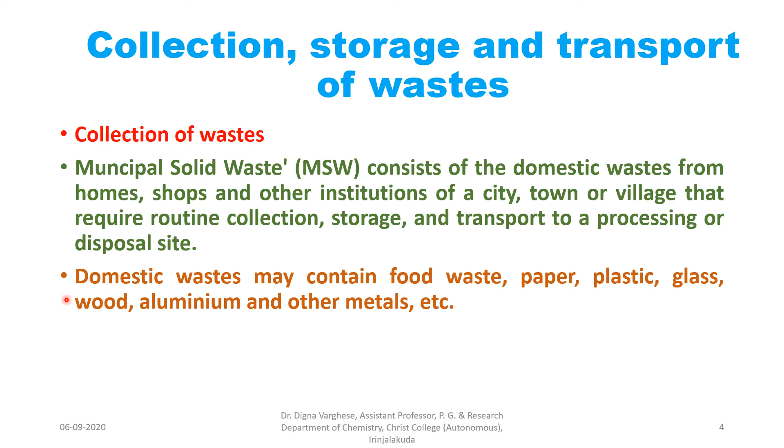Municipal solid waste, that is MSW, consists of the domestic waste from homes and also from shops and other institutions of a city, town or village that require routine collection, storage and transport to a processing or disposal site. Domestic waste may contain food waste, paper, plastic, glass, wood, aluminium and any other metals or

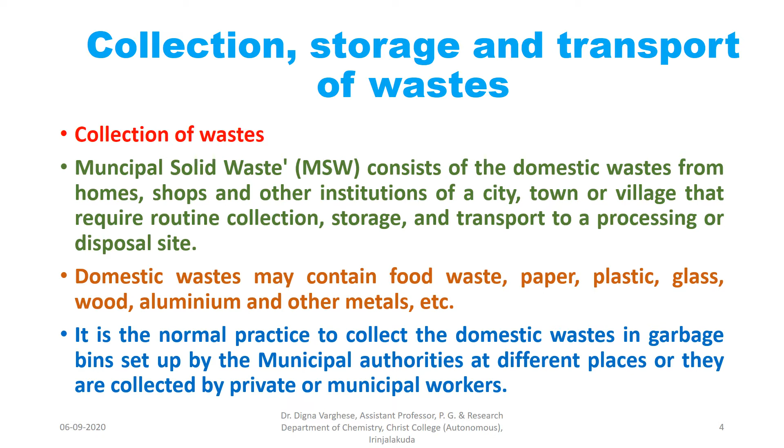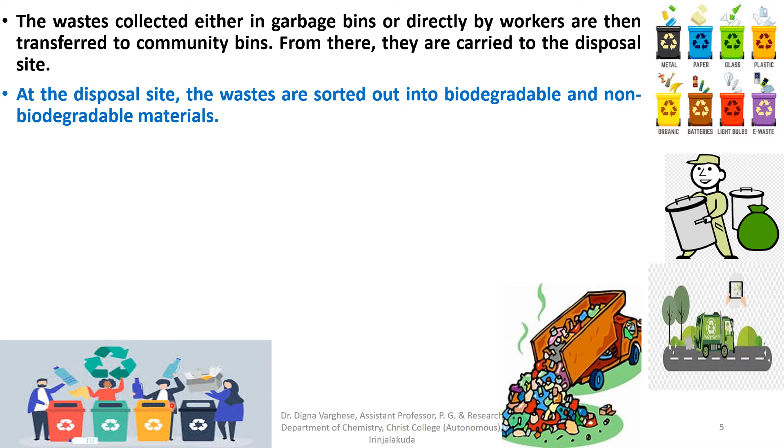unused substances, etc. It is the normal practice to collect the domestic waste in garbage bins set up by the municipal authorities at different places, or they are collected by private or municipal workers. The wastes collected either in garbage bins or directly by the workers are then transferred to community bins. From there they are carried to the disposal site. At the disposal site, the wastes are sorted into biodegradable and non-biodegradable materials.

Unlike the municipal solid waste categories, there is considerable diversity in the characteristics and composition of industrial solid waste because they are generated from many different types of industries. The waste categories are dependent on the nature of the products produced. Each industrial unit makes arrangements for the waste collection, storage, and transportation in consultation with the municipal authorities.

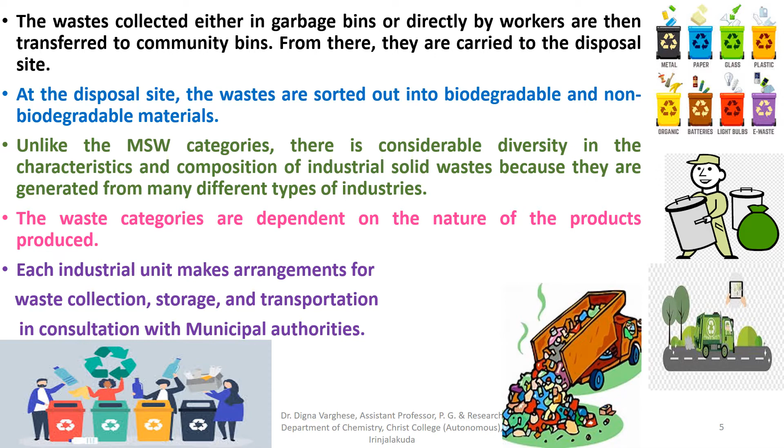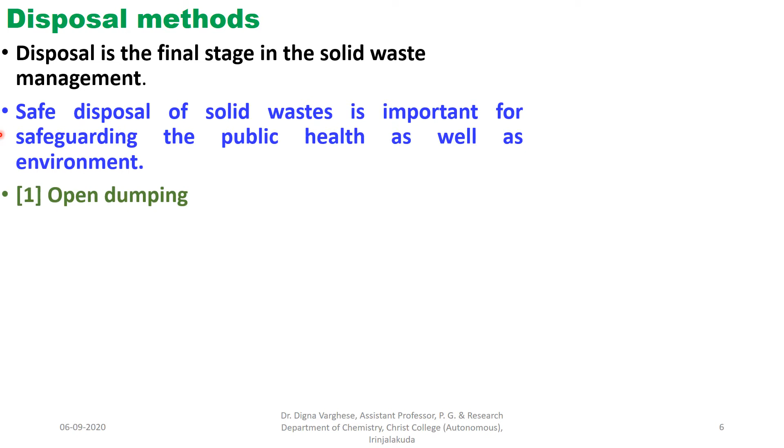Disposal methods. Disposal is the final stage in solid waste management. Safe disposal of solid waste is important for safeguarding the public health as well as the environment. How can we dispose of the waste in a proper way? There are several methods. First one is open dumping. Waste can be dumped in an open place.

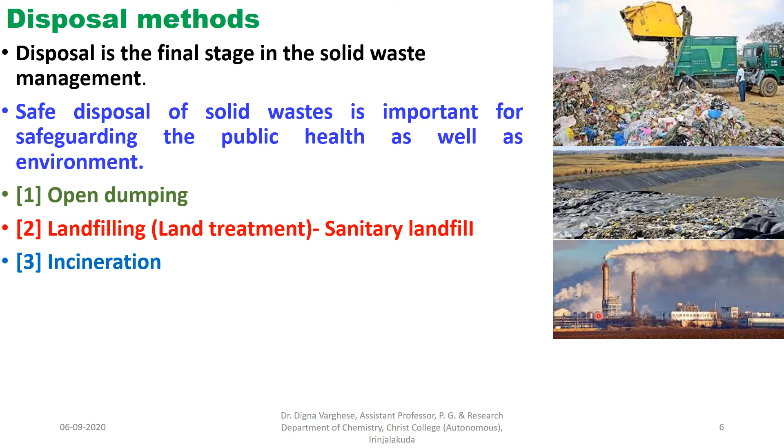Landfilling or land treatment, also known as sanitary landfill, that is, the waste can be filled in a proper land. Incineration, the waste is incinerated into ashes and some gaseous products. Another disposal method is composting, and anaerobic digestion, also known as biogasification. By this, biogas is produced. And the last one is recycling the waste materials.

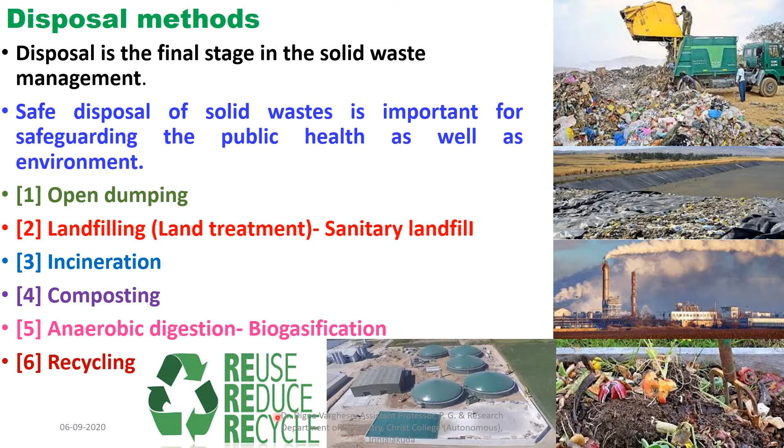The first disposing method of waste is open dumping. In open dumping, the solid wastes collected are deposited or dumped in low-lying areas, usually on the outskirts of the town or village. This method is the easiest method of disposing waste. But this method is unscientific and it is associated with more disadvantages than advantages.

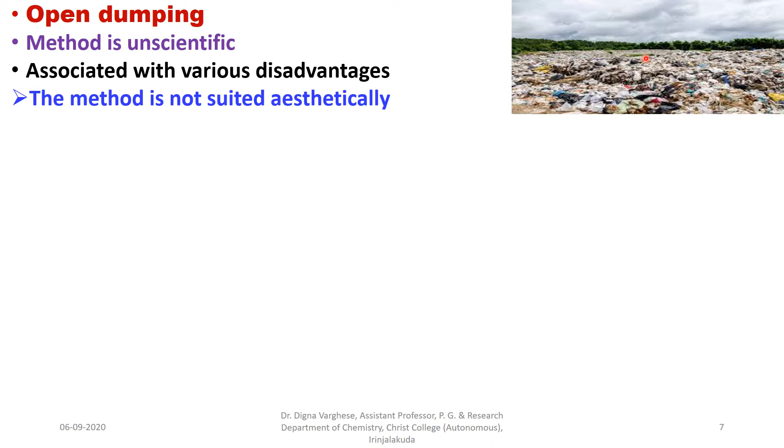The method is not suited aesthetically because we are dumping the waste in a particular place in an improper way, not covered properly or not sorted properly, etc. We are simply dumping the waste. So, open dumping of the waste can emit foul odors that can cause extreme nuisance to the public staying in the vicinity.

Open dumps have uncovered food waste and carcasses that will attract dogs, cats, birds, flies, insects, rodents, etc. Here, the waste from various institutions, homes, hotels, city shops, markets, etc. is not sorted in a proper way. So, there is uncovered food waste and dead bodies of animals that attract dogs, cats, birds, flies, insects, rodents, etc. that can cause extreme disturbances to the public staying in the vicinity.

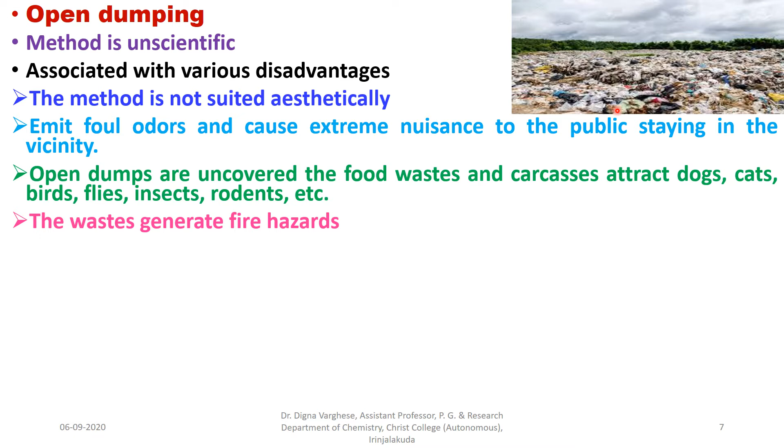These wastes can also generate fire hazards, because in open dumping the waste is not categorized or sorted properly into hazardous or non-hazardous. If it contains any inflammable waste, that will generate fire hazards. The gases from the dumps escape into the atmosphere, adding to the greenhouse emissions. Various waste materials, some degradable, some non-degradable, can emit gases like carbon dioxide, methane, etc. into the atmosphere that will also cause the greenhouse effect.

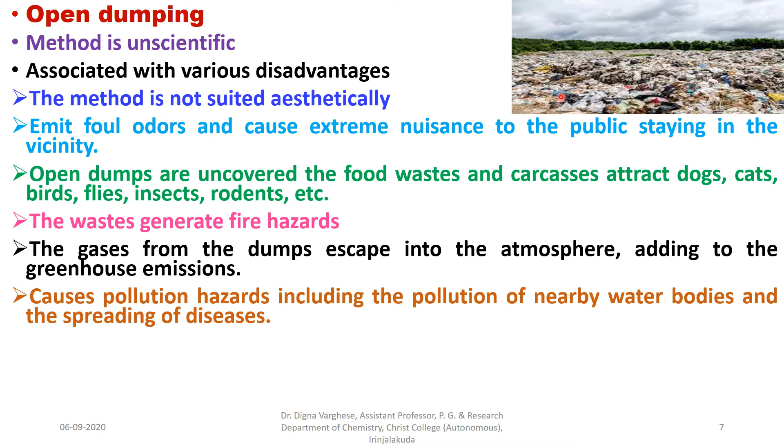Open dumping causes pollution hazards, including the pollution of nearby water bodies and the spreading of diseases. There are so many ways. So if rain comes, the rainwater mingles with or contacts the solid waste particles, and that can pollute nearby water bodies, for example wells of some homes or nearby rivers, and it can spread diseases. It can cause epidemics.

The leachate from the dumps containing heavy metals finds its way to the underground water, rendering it unfit for drinking. Rainwater in contact with the solid waste materials forms leachate from the dumps containing heavy metals.

So it finds its way to the underground water, rendering it unfit for drinking purposes. Deteriorating soil quality and decrease in vegetation abundance are grave consequences of open waste dumping. So the soil quality of this particular place is also lost, and there is a decrease in vegetation also, which can be grave consequences of open waste dumping.

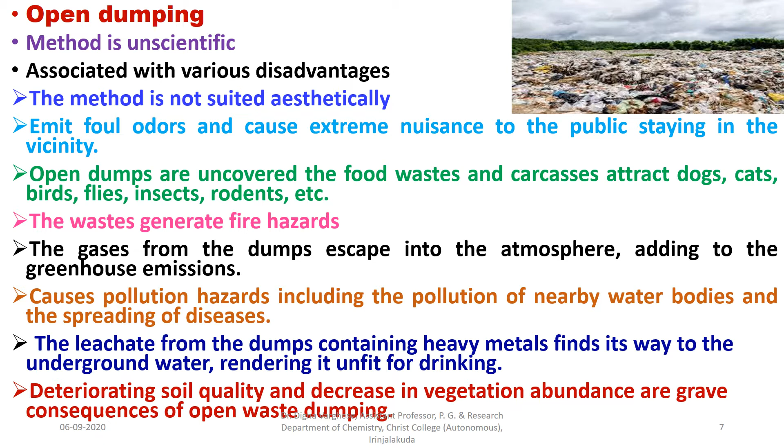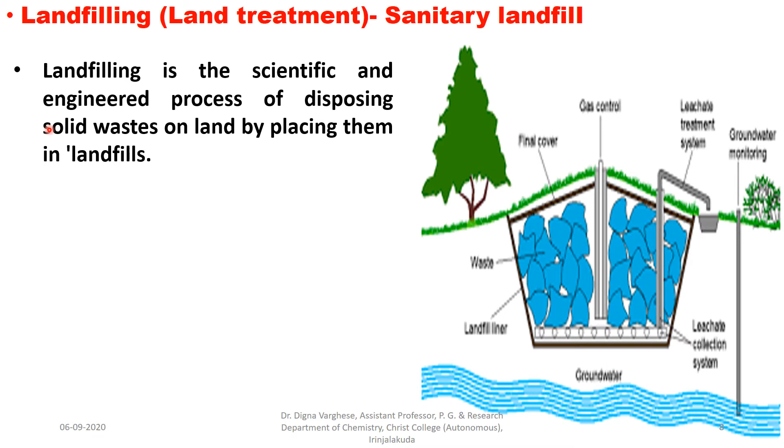Landfilling or land treatment. Sanitary landfill is another method of disposing waste. Landfilling is a scientific and engineered process of disposing solid waste on land by placing it in landfills. Landfills are essentially pits on the land where the environmental risks are controlled at an appropriate level. It is a scientific method.

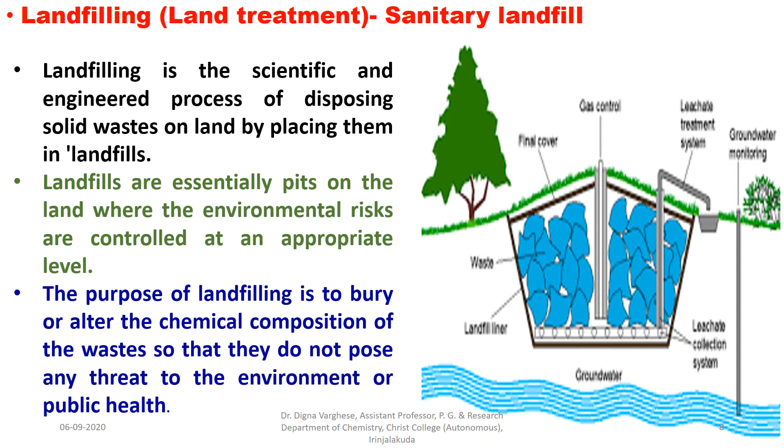The purpose of landfilling is to bury the waste. Here we can see from the figure that the waste is buried in a pit, or to alter the chemical composition of the waste so that it does not pose any threat to the environment or public health. Sanitary landfill is the disposal at a carefully selected site, designed, constructed and operated in a proper way to protect the environment and public health.

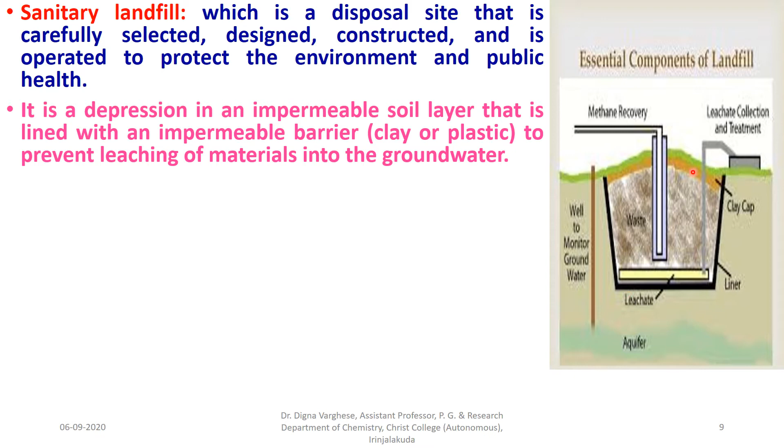So for this particular landfill disposing of the waste, we select a proper place and take a pit there, designed, constructed and operated in a proper way to protect the environment and public health. It is a depression or pit in the land in an impermeable soil layer that is lined with an impermeable barrier. That is, the pit is properly covered by clay or plastic in order to prevent leaching of materials into the groundwater.

We fill the waste in this pit. The sides of the pit are covered with a plastic sheet or a clay material to prevent the leaching of materials into the groundwater. The waste is spread out and compacted into thin layers by heavy machinery. When the waste is placed into the landfill, it is spread out and compacted into thin layers by heavy machinery. Several layers are compacted on top of one another to a maximum depth of about 10 feet.

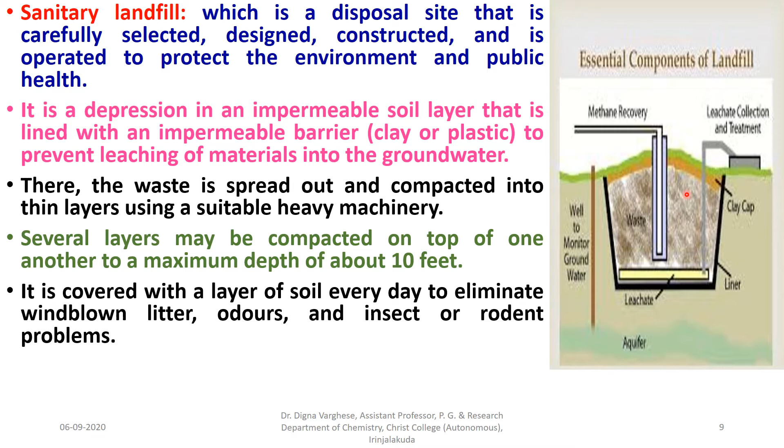It is covered with a layer of soil. Here the placing of the waste occurs, and by the use of heavy machinery it is compacted into thin layers to a maximum depth of about 10 feet. After that it is covered by a layer of soil every day to eliminate windblown litter, odors and insect or rodent problems. Aerobic microorganisms decompose the organic material in the waste until the oxygen present in the waste gets exhausted.

So in sanitary landfill we select a proper place to dispose the waste for land treatment, and it is designed, constructed and operated in a proper way to protect the environment and public health. Actually, the sanitary landfill is a depression, or pit, to place the waste materials, and the side wall of the pit is covered with a plastic sheet or a clay material to prevent the leaching of materials into the groundwater.

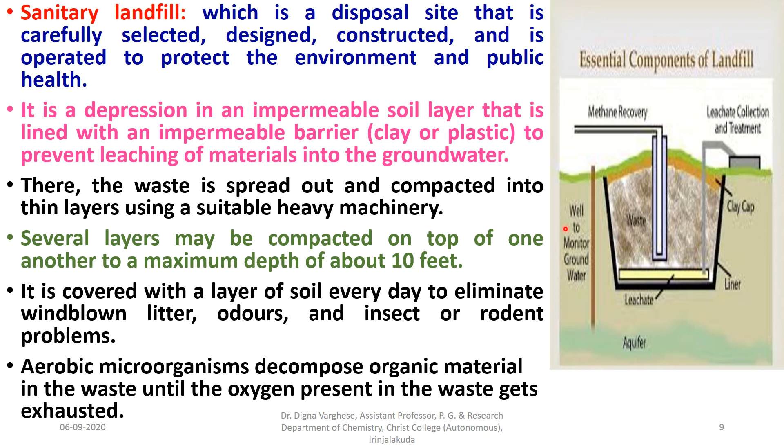Waste is placed into the landfill and compacted by suitable heavy machinery. After that, it is covered with soil to eliminate windblown litter, odors and insect or rodent problems. The aerobic microorganisms decompose the organic material until the oxygen gets exhausted. Anaerobic microorganisms then decompose it, producing methane gas, which is poisonous and explosive. When the oxygen ceases and aerobic action stops, anaerobic microorganisms decompose the organic part of the waste, producing methane.

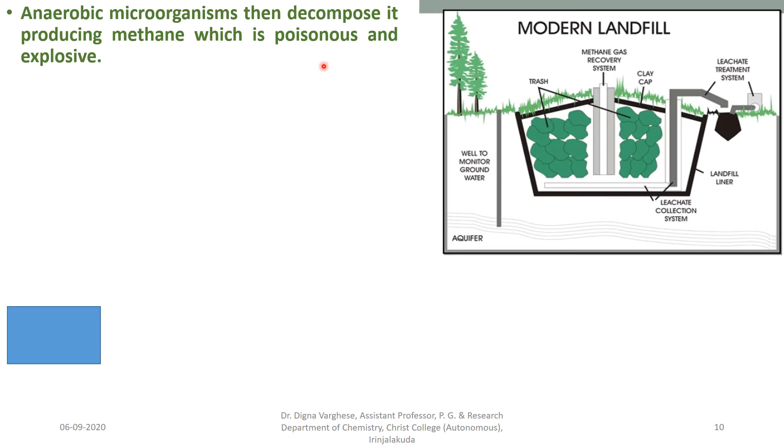The gas is blocked by impermeable barriers made in the landfill and then vented to the surface using a venting system. Here we can see the landfill, and if any gas is coming out, there is a methane gas recovery system, a venting system to the surface, where it is collected safely, diluted with air and dispersed into the atmosphere, or used for beneficial purposes, for example as a fuel and for generating electricity.

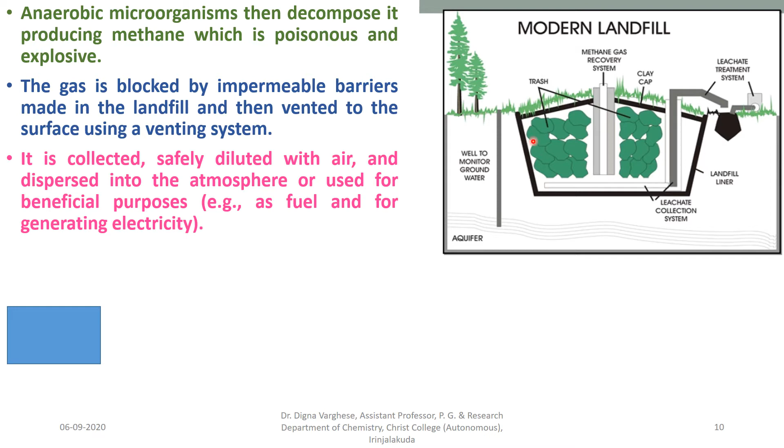So the process of sanitary landfill we can discuss here once more. That is, first we have to select a proper disposal site for the landfill treatment and take a depression or a pit in an impermeable soil layer, that is impermeable by means of covering the wall of the pit with a clay or a plastic sheet in order to prevent any leachate from this waste material from contaminating our water bodies or the soil nearby.

The waste materials are kept in a proper way and compacted into thin layers by using heavy machinery up to a maximum depth of about 10 feet. After that it is covered, and first the aerobic microorganisms decompose the organic material; in the absence of oxygen, anaerobic microorganisms take action.

Producing methane gas, and the methane gas is vented to the surface using a venting system, as we can see from this picture, that is the methane gas recovery system. The gas can be collected or safely diluted with air and dispersed into the atmosphere. Otherwise, it can be used for beneficial purposes, like as a fuel and for generating electricity also.

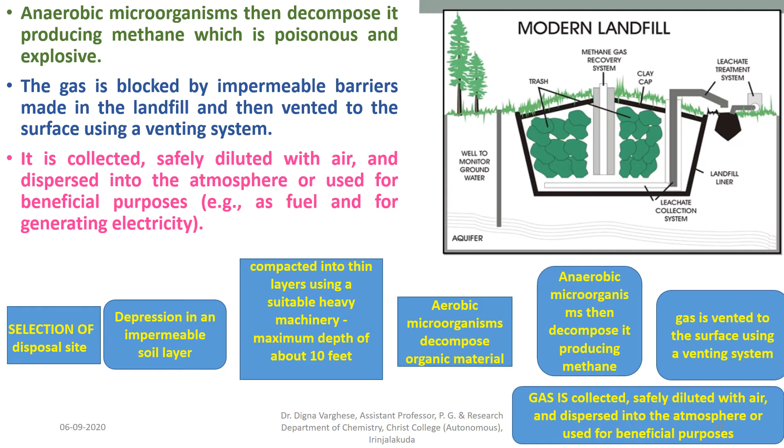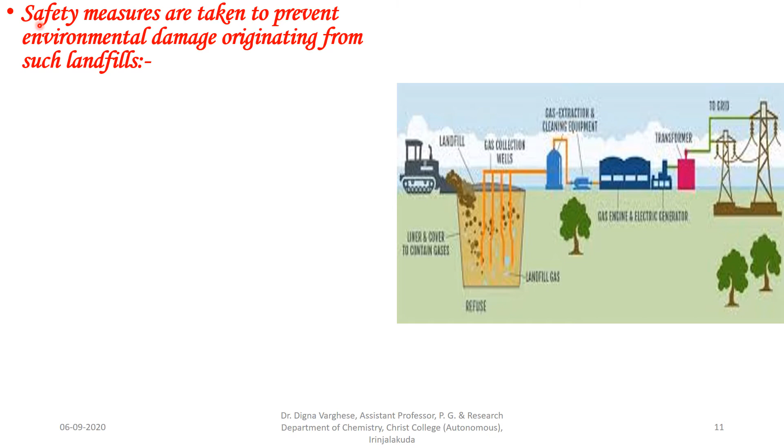Here we have a collection system, leachate from the treatment system also, that can be used for other purposes. Safety measures are taken to prevent environmental damage originating from such landfills. Landfills are located in such places as to prevent contamination from the landfill to the natural environment. Perforated pipes in the layer of sand are used to collect the rainwater that has filtered through the landfill. The highly contaminated liquid called leachate, thus collected, is treated before disposal.

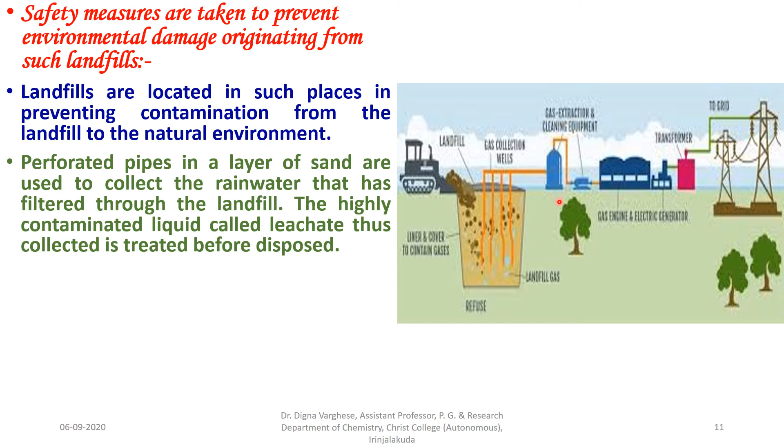So, landfills are located in such places as to prevent contamination of the natural environment. And there are some perforated pipes used to collect the rainwater that has filtered through the landfill; the highly contaminated liquid, that is leachate from the landfill, is collected in a proper way, and before it is disposed, it is treated in a suitable way.

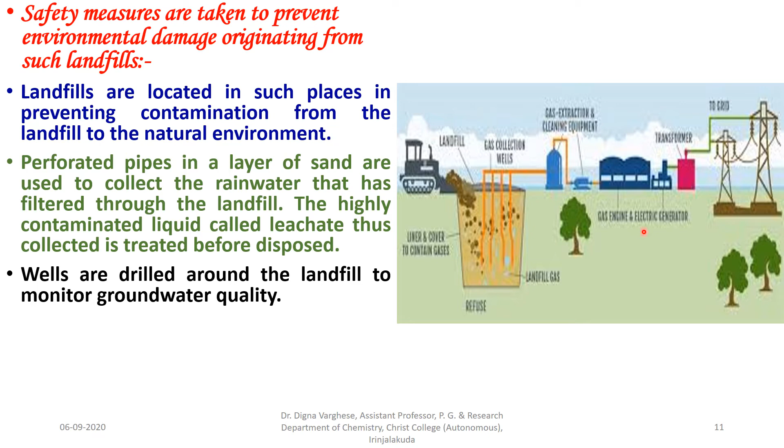And wells are drilled around the landfill to monitor the groundwater quality. A methane recovery system is also there to prevent pollution by methane produced from anaerobic digestion or anaerobic degradation, and the recovered methane is used for beneficial purposes. The gas is collected here, and here we can see it is converted into beneficial uses; from methane we can generate electricity also.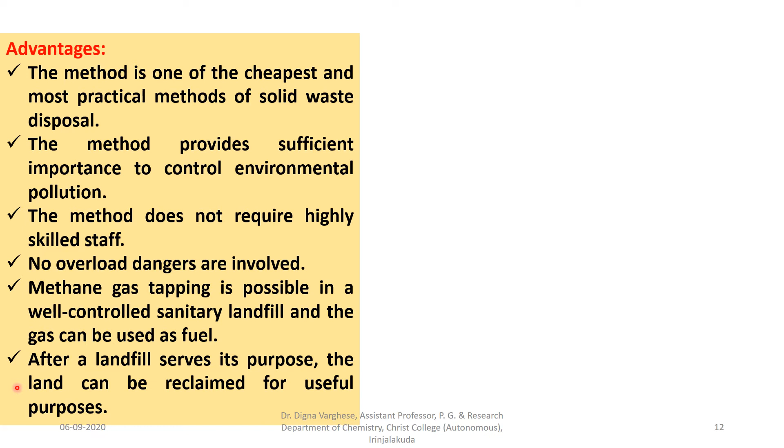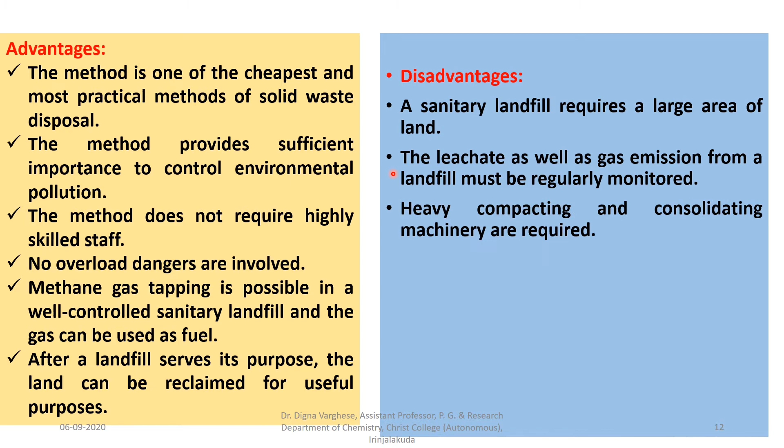And there are some disadvantages of the sanitary landfill. A sanitary landfill requires a large area of land. The leachate as well as the gas emission from a landfill must be regularly monitored. Heavy compacting and consolidating machinery are required for compacting the waste. A landfill causes massive pollution of soil, air, groundwater, and nearby water bodies if there is no proper monitoring system. So, a landfill cannot be built in an environmentally sensitive area. It has to be built in a place where natural land features will assist in preventing pollution of the natural environment.

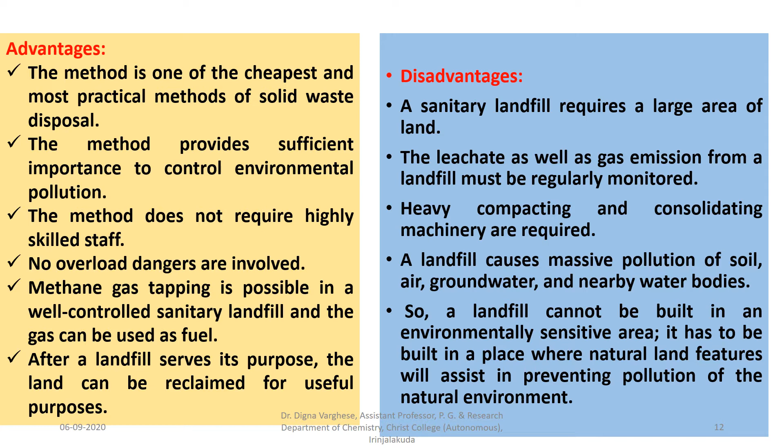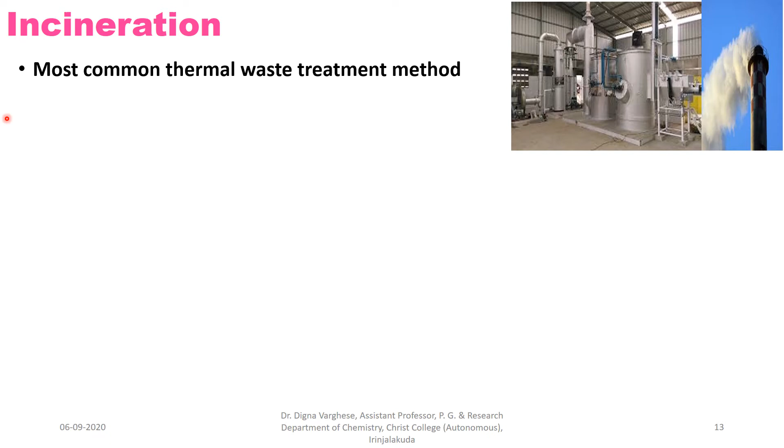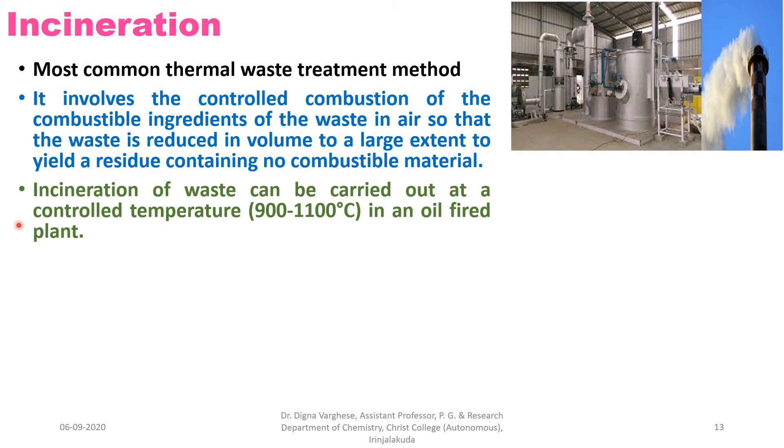The next waste disposal method is incineration. It is the most common thermal waste treatment method. It involves the controlled combustion of the combustible ingredients of the waste in air so that the waste is reduced in volume to a large extent to yield a residue containing non-combustible material. Incineration of waste can be carried out at a controlled temperature, about 900 to 1100 degrees Celsius, in an oil-fired plant.

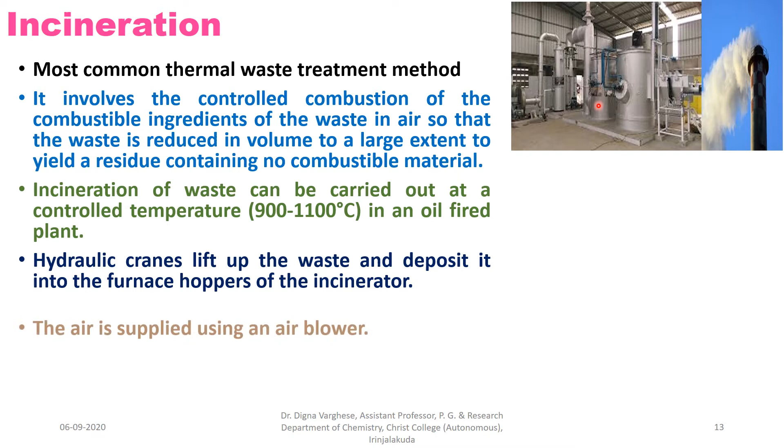Hydraulic cranes lift up the waste and deposit it into the furnace hoppers of the incinerator. The air is supplied using an air blower. The smoke in the effluent gas is removed by electroprecipitators or by a spray system before releasing the gas into the atmosphere. An electrostatic precipitator or electroprecipitator is a filtration device that removes fine particles like dust and smoke from flowing gas using the force of an induced electrostatic charge, minimally impeding the flow of gases through the unit.

That will separate the smoke in the effluent gas before the gas is released into the air. The ash produced is deposited into landfills. After incineration, the waste volume is reduced and the remaining ash produced is disposed of into the landfills. Actually, the waste undergoing incineration produces ash, flue gas and heat.

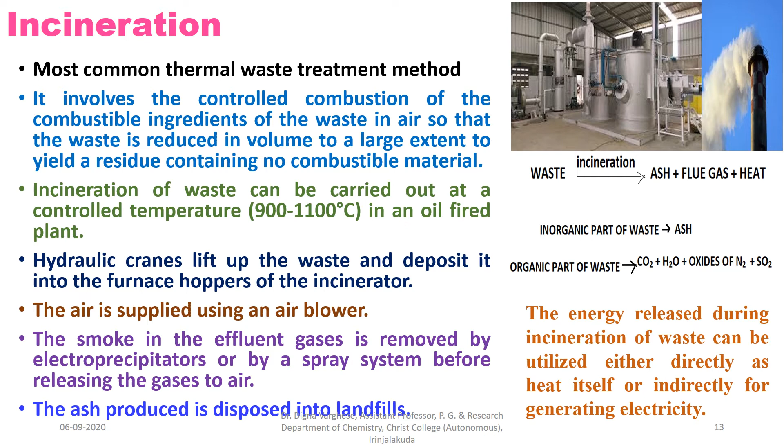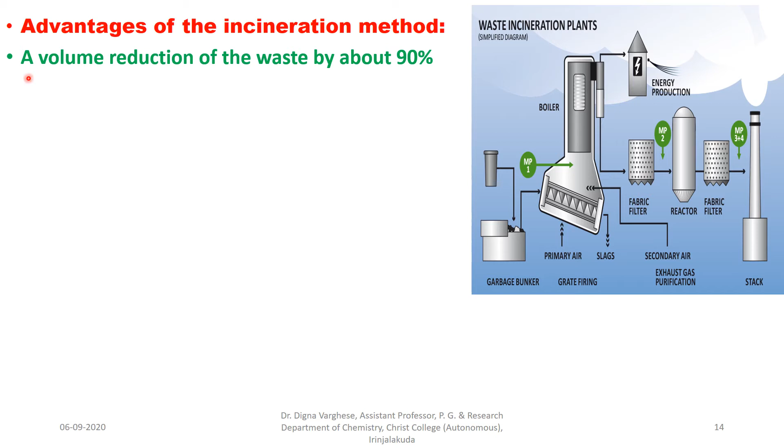Another advantage is that the volume of the waste is reduced. An advantage of the incineration method is a volume reduction of the waste by about 90%. This ensures economic transport to a landfill. After incineration, the waste is converted into ash, flue gas and heat energy. The ash is light, and it ensures economic transport to the disposal site, that is to a landfill. An easier disposal, taking very little space.

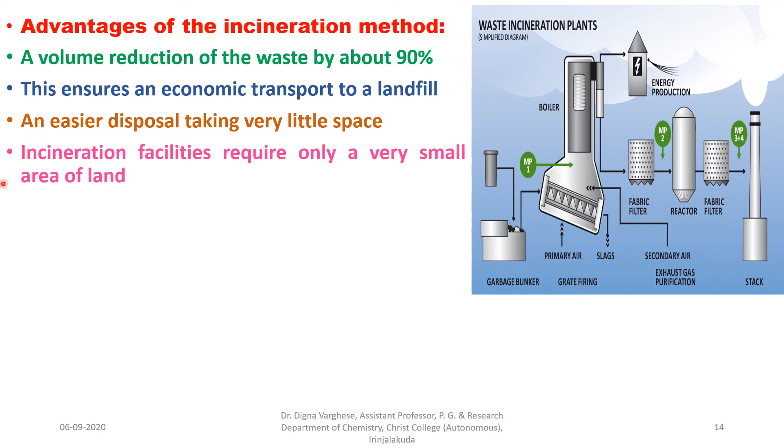Incineration facilities require only a very small area of land. In the case of land treatment or a sanitary landfill we need a large area, but for incineration facilities we need only a small area of land. The incinerator can be placed close to the waste generation or storage areas so that the transportation cost can be reduced. We can keep the incinerator in a place where the waste is generated or stored, so the transportation cost can also be reduced.

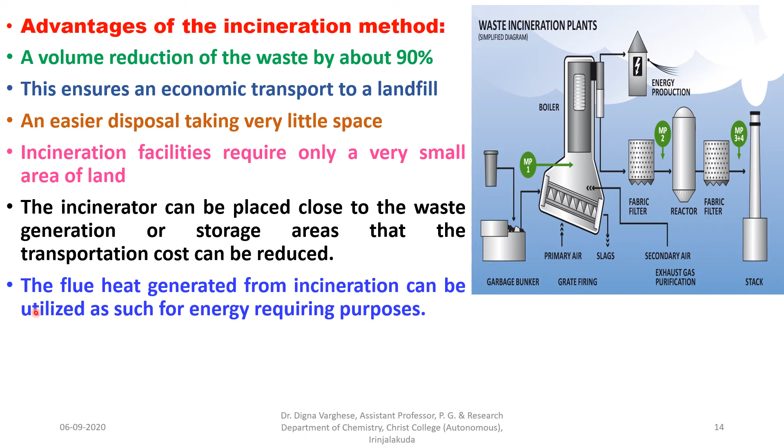The flue heat generated from incineration can be utilized as such for energy-requiring purposes. We can use it for electricity, that is energy production, or a steam boiler. It can also be used via proper arrangements to convert water into steam in boiler systems, which can then be utilized to run steam turbine generators to produce electricity. Such waste-to-energy technology becomes economically viable if the calorific value of the waste is high. That is a very good advantage of the incineration method.

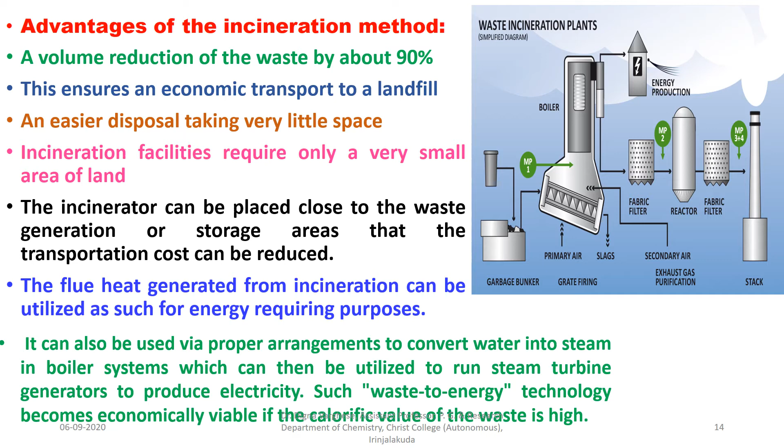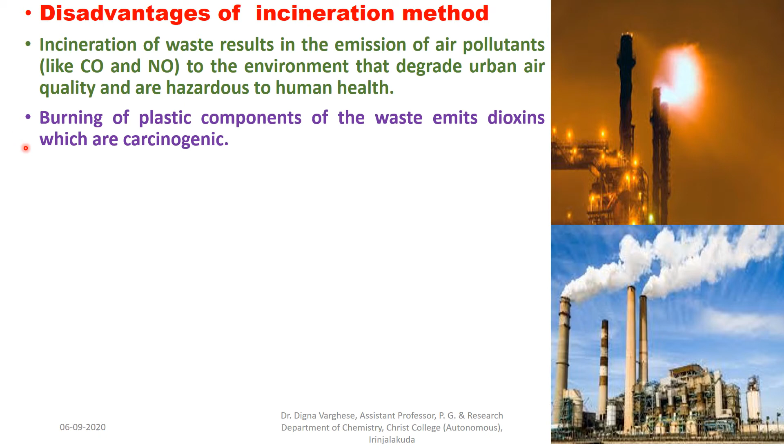Disadvantages of the incineration method. Incineration of waste results in the emission of air pollutants such as carbon monoxide and various nitrogen oxides to the environment that degrade urban air quality and are hazardous to human health. Burning of plastic components of the waste emits dioxins, which are highly carcinogenic and can cause cancer. Burning of wet waste often requires adding supplemental fuel, which brings higher cost to the operation. If wastes are not properly dried, we have to add additional fuel to burn the waste materials, which will increase the cost of the operation.

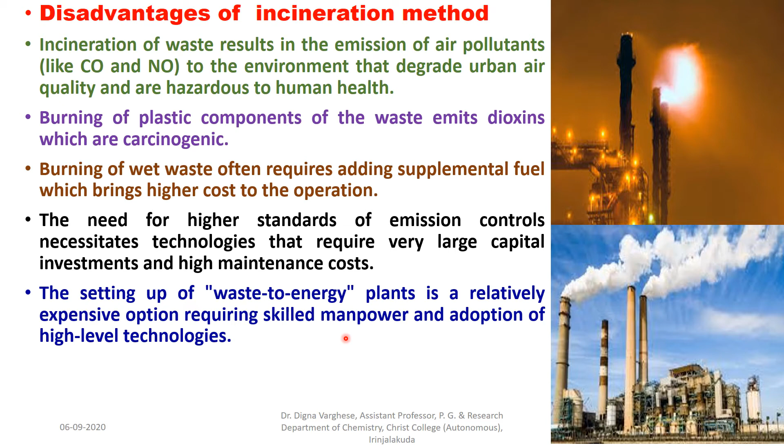The need for higher standards of emission controls necessitates technologies that require very large capital investments and high maintenance costs. Setting up waste-to-energy plants is a relatively expensive option requiring skilled manpower and adoption of high-level technologies, which will increase the cost of the operation. Electricity generation using the flue heat in boilers is not economically feasible for developing countries like our country, because the waste does not provide enough fuel value for profitable energy production.

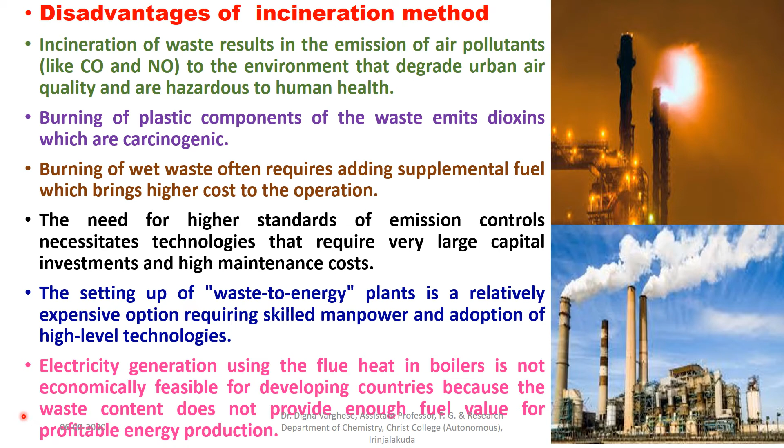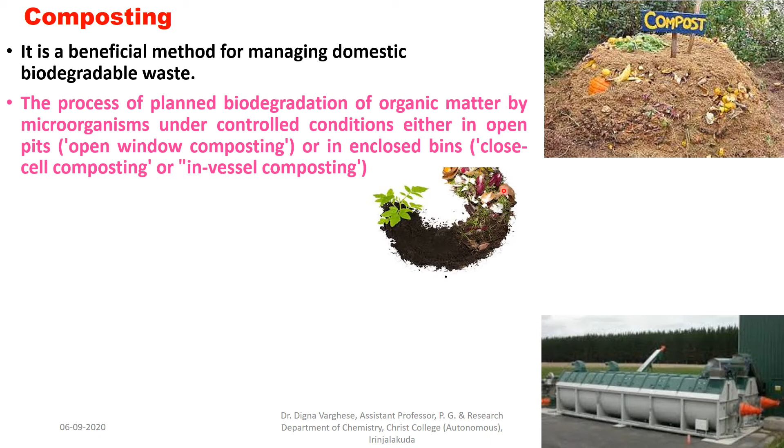Another method of disposing of waste is composting. It is a beneficial method for managing domestic biodegradable waste that we see in our homes. It is the biodegradation of organic matter by microorganisms under controlled conditions, either in open pits, that is open windrow composting, or in enclosed bins, that is closed cell or in-vessel composting. Open windrow composting requires relatively large land areas. In-vessel composting requires one or more closed tanks or digesters equipped with rotating vanes that mix and aerate the shredded waste, providing the right conditions for bacteria and fungi to convert the organic waste to compost.

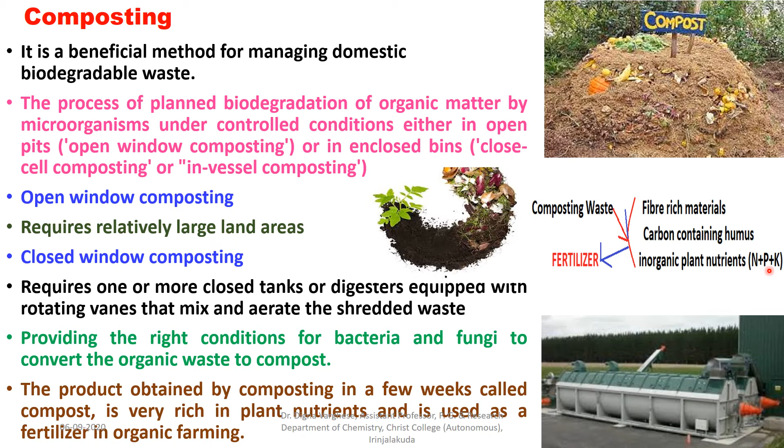The product obtained by composting in a few weeks is called compost. It is very rich in plant nutrients and is used as a fertilizer in organic farming. Composting waste gives compost that contains fiber-rich materials, carbon-containing humus, and inorganic plant nutrients such as nitrogen, phosphorus and potassium, so it can be used as a fertilizer in organic farming.

Composting is divided into two types. Anaerobic composting is without oxygen: decomposition occurs where oxygen is absent or in limited supply. The other one is aerobic composting: decomposition takes place in the presence of oxygen, the processing time is shorter, and methane emissions to the environment are also avoided. That is the advantage.

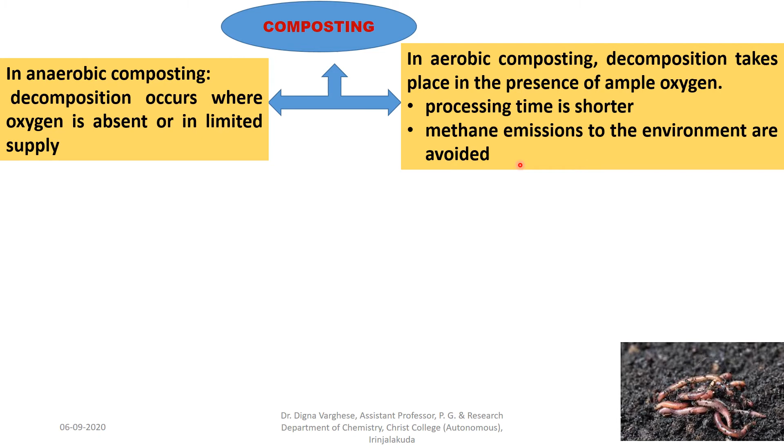Composting, that is the enzymatic degradation of organic materials as they pass through the digestive system of earthworms. This process is termed vermicomposting and mimics natural decomposition of waste material by microorganisms. Vermicomposting of the waste is done in a pit lined with dried leaves or grass by introducing a culture of earthworms, now produced commercially, under moist conditions. Fertile compost is obtained in about 45 days.

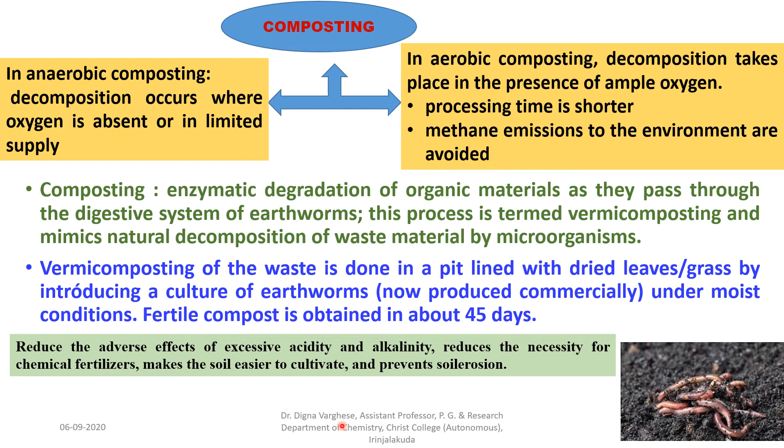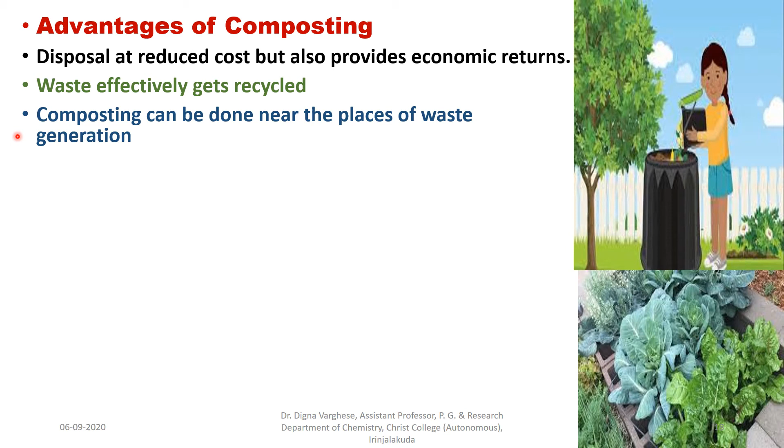So it can reduce the adverse effects of excessive acidity and alkalinity, reduce the necessity for chemical fertilizers, make the soil easier to cultivate, and prevent soil erosion also. Those are its advantages. Now we are discussing the advantages of composting. Here the disposal is at reduced cost, but also it provides economical returns. Waste effectively gets recycled here; composting can be done near the places of waste generation, which we can do in our home also.

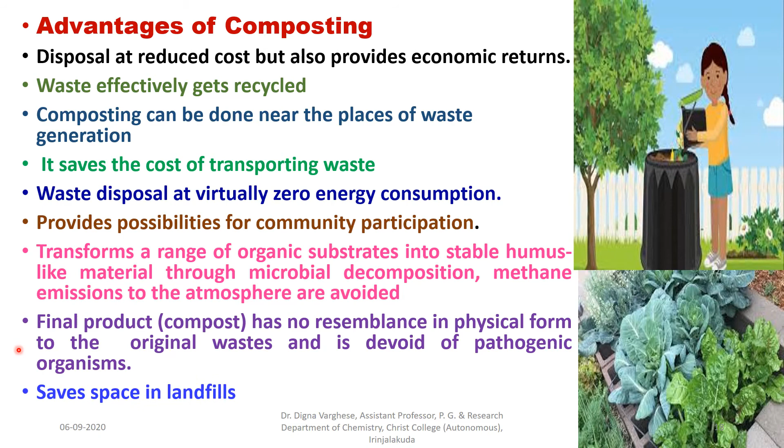It saves the cost of transporting waste. Waste disposal at virtually zero energy consumption. Provides possibilities for community participation also. And composting transforms a range of organic substrates into stable humus-like material through microbial decomposition. Methane emissions to the atmosphere are avoided in an open composting method. The final product has no resemblance in physical form to the original waste and is devoid of pathogenic organisms also. It saves space in landfills.

There are some limitations of composting: waste containing significant amounts of non-biodegradable waste like plastics, heavy metals, etc., is not suitable for composting. So a thorough removal of non-biodegradable portions of the waste is required before composting. If the market for compost in the vicinity of the generation sites is inadequate, considerable transportation costs may be involved.

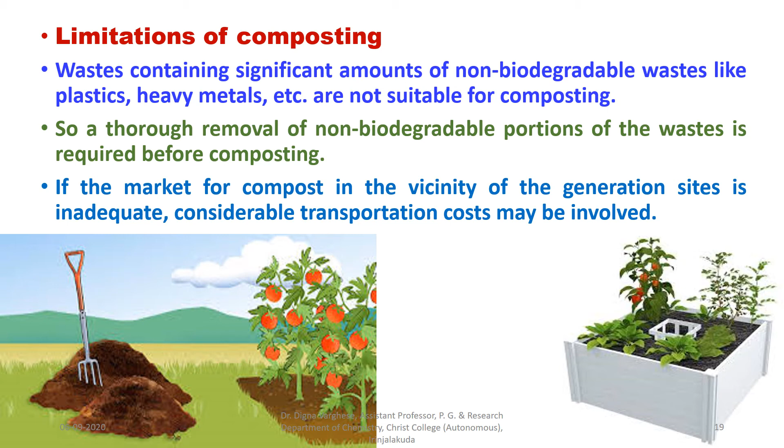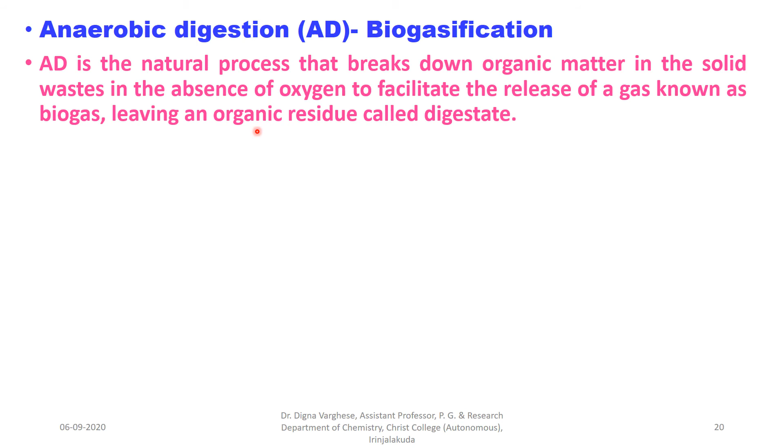The next waste disposal method is anaerobic digestion, AD, which is also known as biogasification. Anaerobic digestion is the natural process that breaks down the organic matter in solid waste in the absence of oxygen to facilitate the release of a gas known as biogas, leaving an organic residue called digestate. Organic waste, in the presence of anaerobic microorganisms, in the absence of oxygen or in a limited supply of oxygen, decomposes into 40 to 70% methane, then carbon dioxide and water. Methane-rich biogas is produced in the process. It is also known as biogasification or biomethanation.

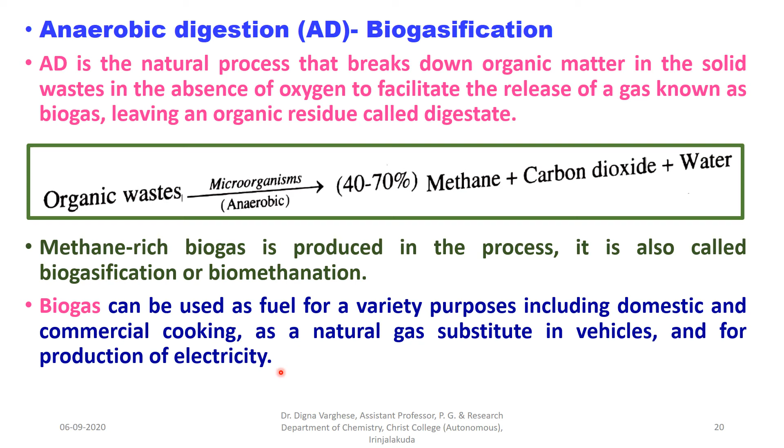Biogas can be used as a fuel for a variety of purposes, including domestic and commercial cooking, as a natural gas substitute in vehicles, and for the production of electricity also. The digestate, the organic residue remaining after removing the gas, is a nutrient-rich byproduct of anaerobic digestion which can be used as a fertilizer and a soil improver. So in anaerobic digestion two byproducts are obtained: biogas and digestate. Biogas can be converted into energy and digestate can be converted into fertilizer.

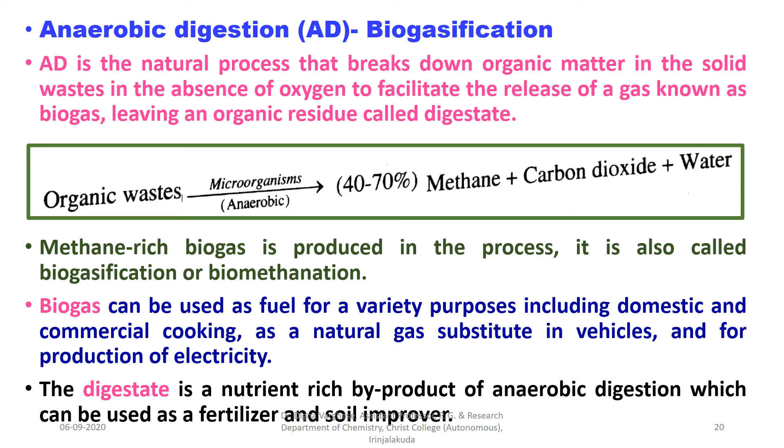So anaerobic digestion of biodegradable organic waste uses putrefactive bacteria, that is methane-producing bacteria, and an oxygen-free environment to degrade the waste. In an anaerobic digester there are putrefactive or methane-producing bacteria, and in the oxygen-free environment these bacteria decompose the organic matter of the waste and produce methane gas, the real biogas. It is carried out in an enclosed space known as a digester, under controlled conditions of temperature, moisture and pH, that is 7.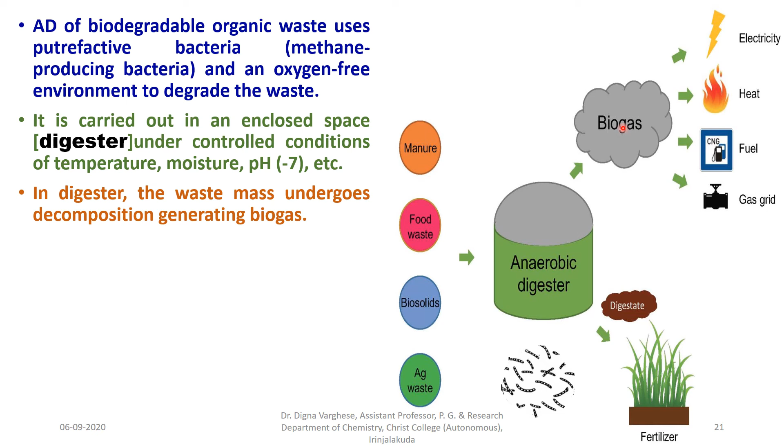In the digester, the waste mass undergoes decomposition, generating biogas. In a digester there are putrefactive or methane-producing bacteria. In the absence of oxygen, anaerobic digestion occurs and produces biogas. After the biogas release there is some organic residue, known as digestate, that can be used as a fertilizer or soil improver. The digester of a biogas plant consists of a thermally insulated digestion tank, a heating system, mixer systems and discharge systems for sediments and the spent substrate. From this biogas we can produce electricity, heat energy, natural fuel and also gas for the grid.

And here we can see from the figure an anaerobic digester. In it, putrefying or methane-producing bacteria are present. In the absence of oxygen, many wastes, such as agricultural waste, biosolids, food waste, manure, etc., are here, and by the action of bacteria the organic part of the waste is converted to biogas. After the release of the gas, there is some organic residue in the digester, known as digestate, that can be used as a fertilizer, and the biogas is converted into several energy forms.

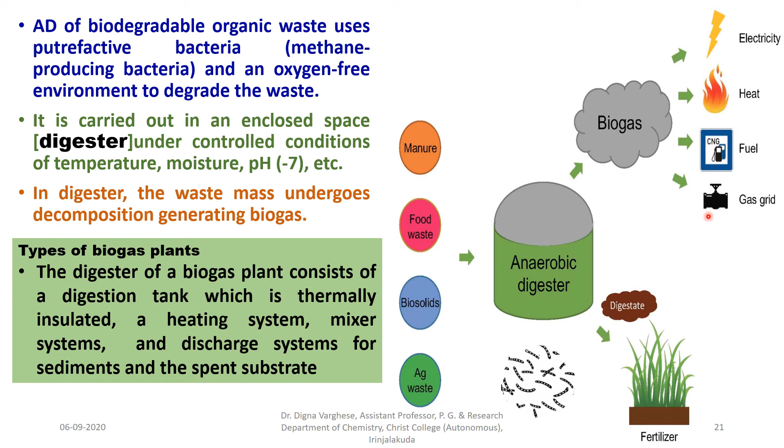The digestion process consists of two main phases. In the first phase, proteins, carbohydrates and fats give rise to fatty acids, amino acids and alcohol. These are converted into methane, carbon dioxide and other gases including ammonia and hydrogen sulfide in the second phase. Solid waste including animal excreta and poultry litter, food waste from domestic, commercial and industrial sources, green waste from parks and gardens, etc., can be used as feedstock for the digester to produce biogas. Advantages of anaerobic digestion.

Biogas produced from anaerobic digestion of solid waste forms an important fuel for cooking. Biogas can be compressed, much like natural gas, and used as a fuel in motor vehicles. Biogas can also be used in a gas engine to convert its energy into heat and electricity.

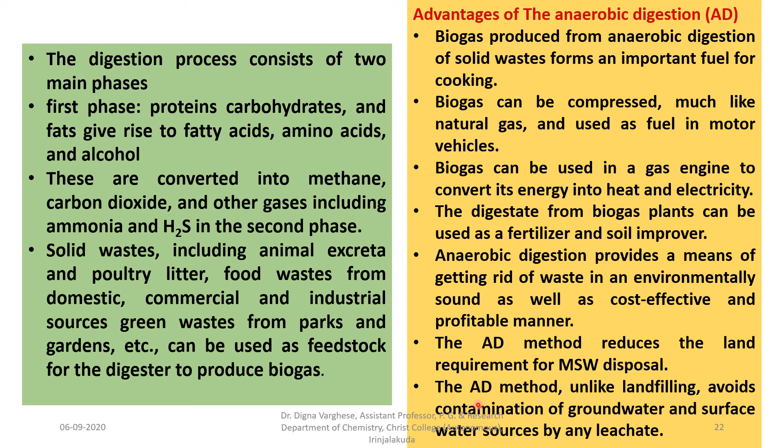The digestate from biogas plants can be used as a fertilizer and soil improver. Anaerobic digestion provides a means of getting rid of waste in an environmentally sound as well as cost-effective, profitable manner. The anaerobic digestion method reduces the land requirement, and it also avoids contamination of groundwater and surface water sources by any leachate.

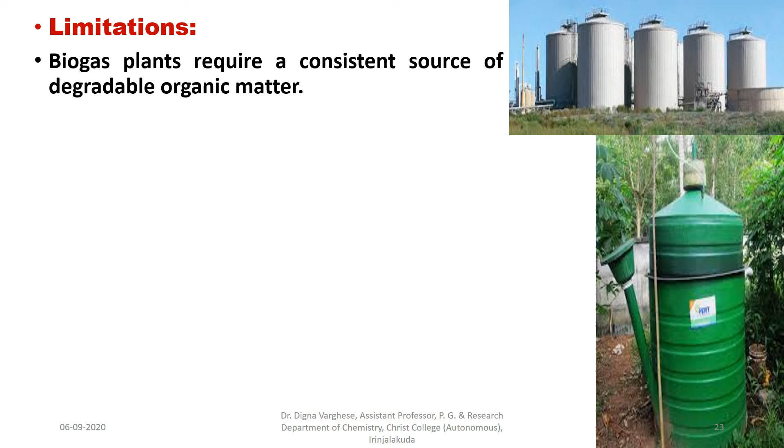Here are some limitations of the anaerobic digestion method. Biogas plants require a consistent source of degradable organic matter. The waste fed into the biogas plant must mostly be free from non-biodegradable materials like plastics, so prior careful separation of such materials from the waste is necessary.

There has to be a sustainable demand for the generated biogas in the vicinity of the plant at appropriate profitable conditions. There should also be a market potential for the digestate produced during the process as manure in order for the process to be economically viable. So these are the limitations of the biogasification method.

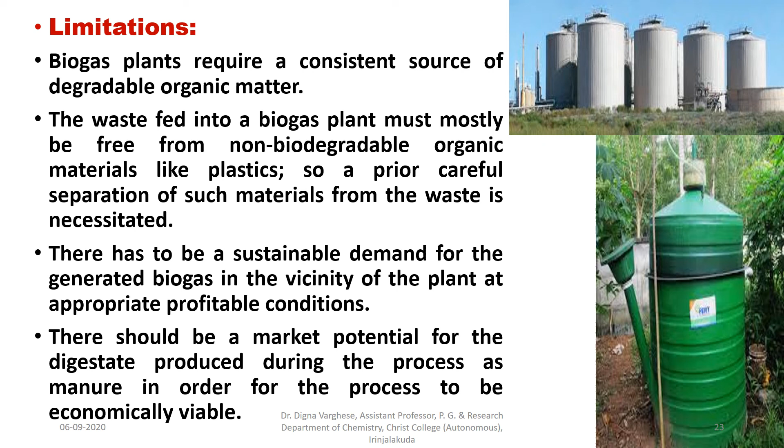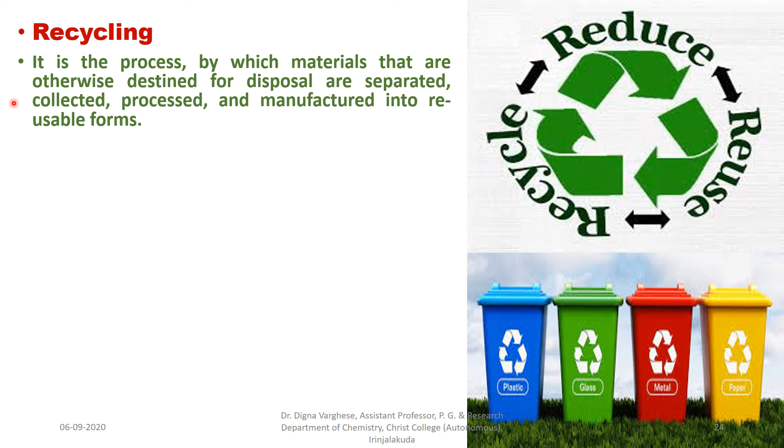Recycling. The last disposal method for waste is recycling. It is the process by which materials that are otherwise destined for disposal are separated, collected, processed and manufactured into reusable forms. Materials like paper, plastic, metals and glass are commonly recycled in many parts of the world.

The steps involved in recycling: we can collect it in suitable bins, that is for plastic, glass, metal and paper, and this separated material is first cleaned by washing. After that, the main process is fabricating, that is cutting, bending and fixing. After fabricating, it is remelting followed by molding or extrusion.

First, the separated material is cleaned by washing. Second is fabricating. Third is remelting. After that, molding. Recycling can be done only a limited number of times, as the quality of the recycled product decreases with every processing cycle.

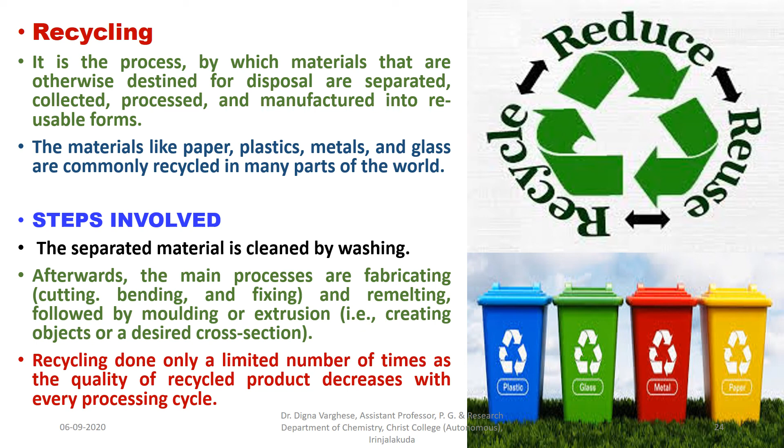Advantages of the recycling method: recycling decreases the accumulation of all kinds of waste, including municipal solid waste and industrial waste, at all kinds of waste disposal sites. Recycling minimizes air, water, and soil pollution because waste products are reused rather than just being thrown away recklessly in landfills. We can collect plastic, metal, paper, or glass materials from open dumping places, landfills or other disposal sites.

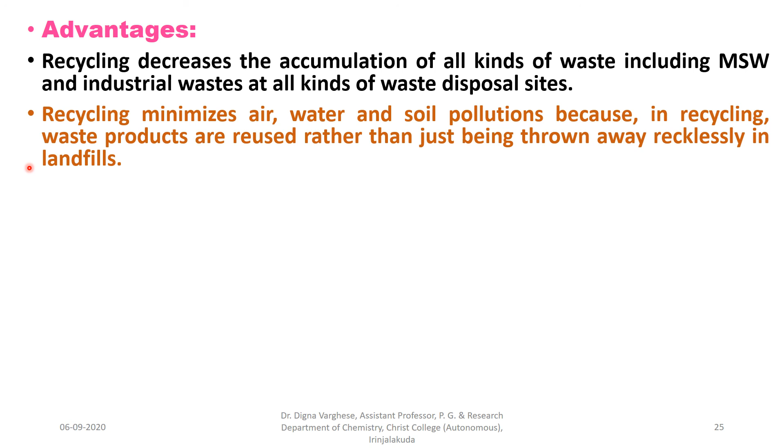So recycling minimizes air pollution, water pollution, and soil pollution because it is reused rather than just thrown away on the surface. Recycling of non-biodegradable waste like plastics saves the world from toxic leakages. That is very important. Recycling protects our environment.

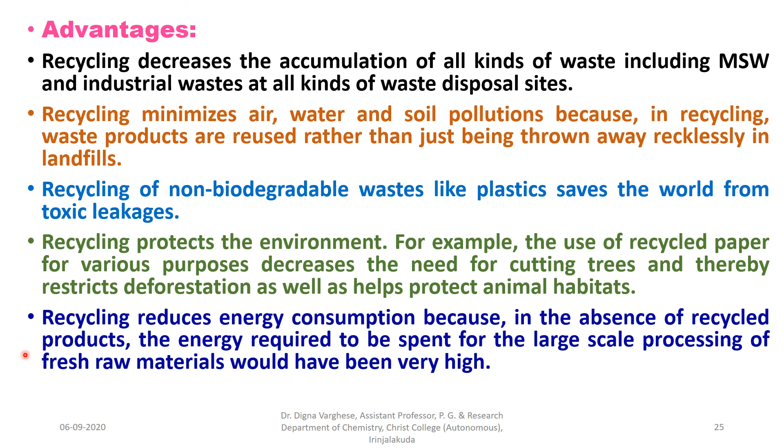For example, the use of recycled paper for various purposes decreases the need for cutting trees, and thereby restricts deforestation as well as helps protect animal habitats. Recycling reduces energy consumption. In the absence of recycled products, the energy required for large-scale processing of fresh raw materials would have been very high. So the energy consumption for recycling is less.

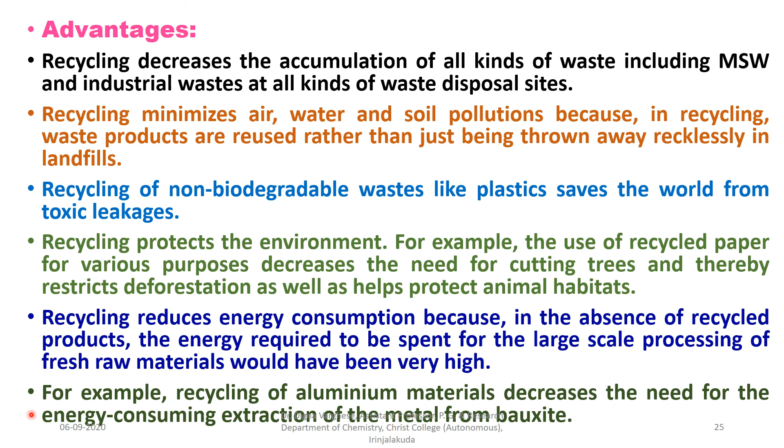For example, recycling of aluminum materials decreases the need for the energy-consuming extraction of the metal from bauxite. Then the recycling of materials like glass and metals ensures the sustainable use of natural resources as well as conserves them. In the absence of recycled products, more fresh products would have been manufactured by mining and extraction of fresh raw materials from the Earth's crust.

Recycling also minimizes global warming because the process reduces the need for combustion of waste and thereby restricts the release of greenhouse gases. Further, as waste recycling processes generally require only minimal use of fossil fuels, recycling causes minimal release of greenhouse gases. Recycling generates job opportunities as recycling plants require workers.

So there are several advantages of recycling: it restricts the release of greenhouse gases, it provides job opportunities, and it ensures the sustainable use of natural resources, so we can conserve natural resources also.

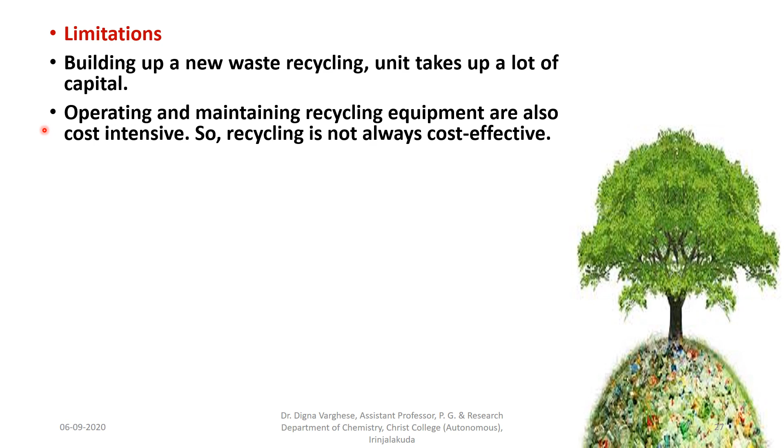But there are some limitations of recycling. Building up a new waste recycling unit takes up a lot of capital. Operating and maintaining recycling equipment is also cost intensive, so recycling is not always cost effective. Products of recycled materials may be of inferior quality compared to those manufactured from fresh raw materials.

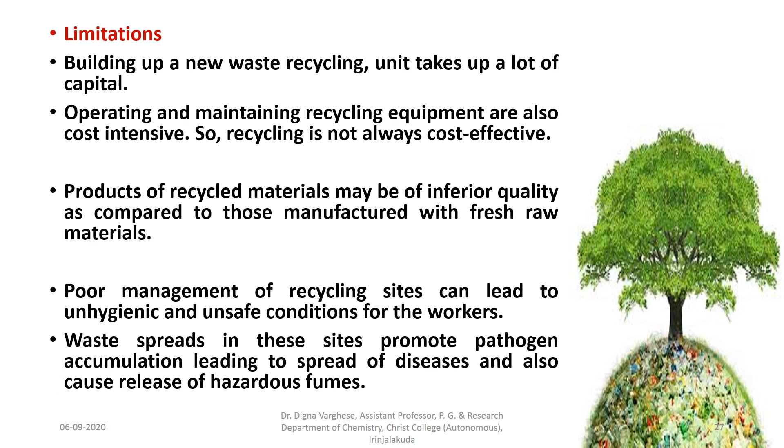Poor management of recycling sites can lead to unhygienic and unsafe conditions for the workers. Waste spread in these sites promotes pathogen accumulation, leading to the spread of diseases, and also causes release of hazardous fumes. Thank you all for listening.